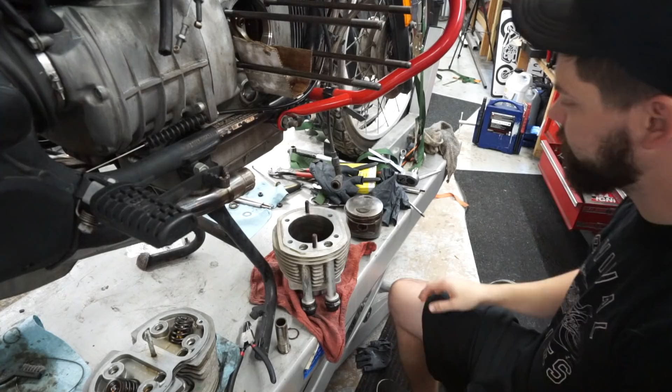Where I left off last time was we had just discovered that a portion of our oil control ring was broken. I had a lot of questions in the comments about, well, where's the rest of the ring? It's all still in here. The rest of the ring is all complete. Everything is completely fine. It's literally just this outside section that broke off.

Very luckily, it did not mess up our piston skirt or the ring lands, anything like that. There was also absolutely no evidence of the break on the cylinder wall itself. Sometimes when piston rings have issues, they can kind of gouge up the sides of these walls. This is 100% exactly like you would expect it, so we're very, very lucky. I went ahead and ordered a complete OEM set, so it's going to include all three rings. We're going to go ahead and replace all three of them.

What I need to do first is pull them off. You can do this by hand. I have a set of piston ring pliers that just make it a little bit easier to do so. If you bend one of these rings a little bit too far one way or the other, they will shatter. I have a video on that very subject. But this is designed to kind of evenly expand the ring out so that you don't run into any of those problems.

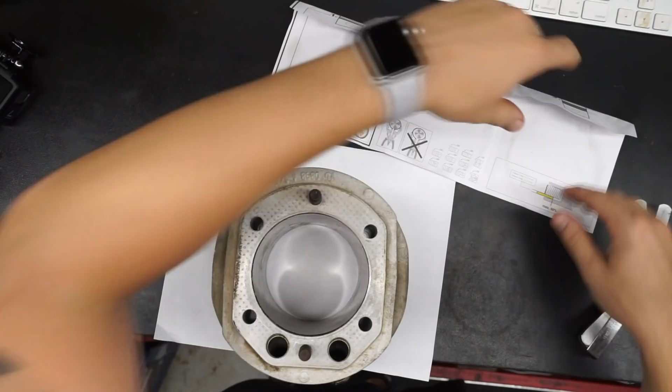Once I get these out, we actually need to measure our new rings and make sure that our end gaps are all exactly within spec. So I'll walk you guys through that process. So what I'm going to do now is measure the piston ring end gap, as it's called. I'm going to start with our first compression ring. This one's going to be at the very top. Generally these do have a top and bottom. There's a little stamping right there that says top, so we know that that's going to be going towards the outside of the cylinder, away from the block.

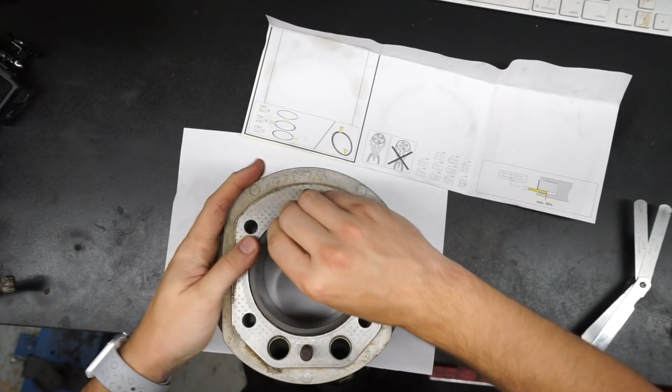What we do is just kind of gently get this into the bore. We're just looking to get it started all the way around, just kind of like that. We take our piston with no rings installed, flip it upside down, and what we're looking to do is press this down and get it nice and square in the bore. And what I can do to confirm that is I am actually using the ring land for the very bottom ring. So I'm using this line right here to make that completely flat with the top portion of the cylinder. That way I know that this piston ring is square in the bore.

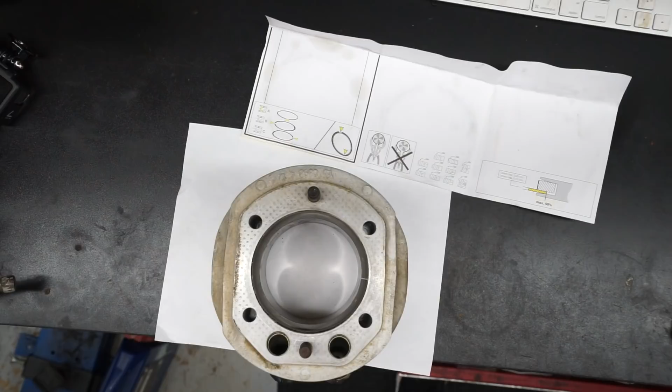Now that I know it's square in the bore, I don't know if you can see on this side right over here, there's a small gap where the end of that piston ring is matching up. There's actually a specification in the book for how big that gap is supposed to be. There's kind of a minimum and a maximum clearance. For this particular bike, we're looking at between, let's see, I got the book over here, 0.4 millimeters on the small side, 0.65 millimeters on the big side. So we want it to fall in between that.

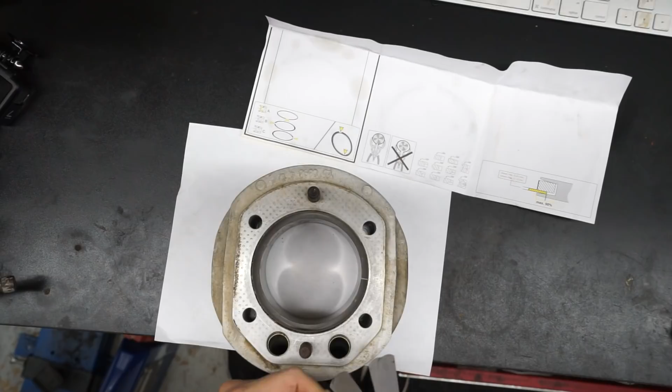So I got my feeler gauges here. I'm just going to go straight to 0.65. We want to make sure it's not bigger than that. 0.65 does not fit in there. So that's good. We'll go down to 0.4.

0.4 millimeters. Plenty of space. So we know now that that spacing is between those two, which means it's in spec. I'm going to go a step further and actually just figure out exactly what it is, just out of curiosity. So we'll try a couple random ones. Did I just nail it?

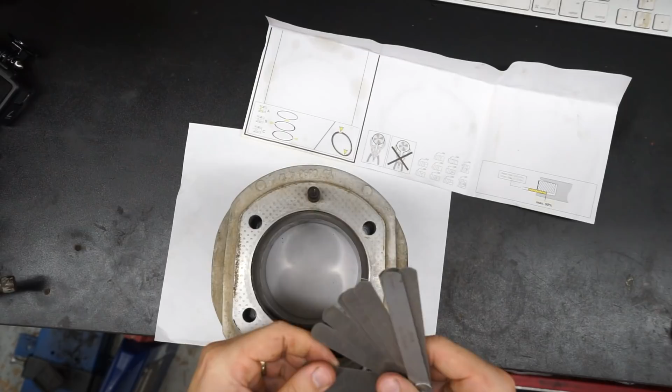Looks like 0.58. Let's look at 0.6. No, wow, I nailed it. 0.58 millimeters is what our gap is, which is exactly between spec. So we can nice and easily kind of evenly pull this out. Exact same spec on the number 2

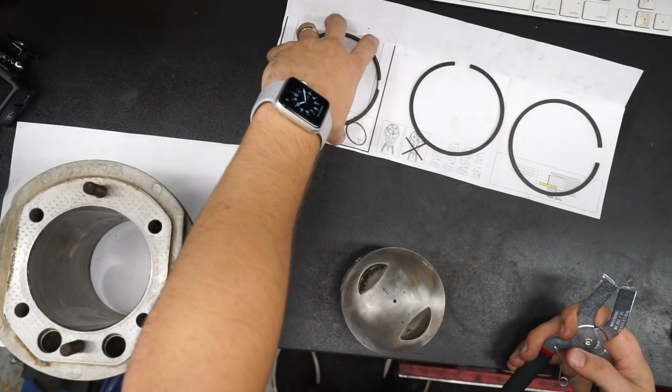compression ring. And then our oil control ring, we want a little bit tighter of a gap on there. We're going to be looking for 0.25 to 0.4. So I'll double check all three of these and then we'll get them installed. Confirmed all of our ring gaps are within spec. Not super surprising with a quality, stock size replacement.

It's generally when you get into the real custom stuff is when you have to start to adjust those end gaps. If you're building an engine for like forced induction or something like that, you'll probably go with a little bit wider end gap to compensate for the added pressure in the cylinders from boost. That can kind of expand those rings, and if they're too tight, you can actually break off ring lands and all kinds of crazy stuff. But this is just a stock engine, so we don't have to worry about that on this particular build.

So what I'm going to do now is just take my piston ring pliers, start to get our rings in place. This little spring part in the oil control ring is a little bit, shall we call it, fiddly. I'm going to see if I can put it on beforehand and then sneak the piston ring over top of it.

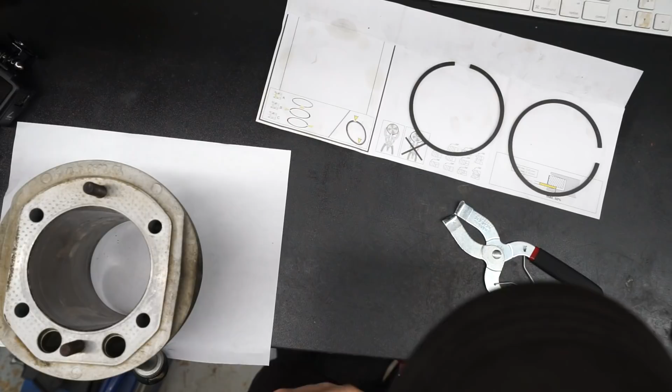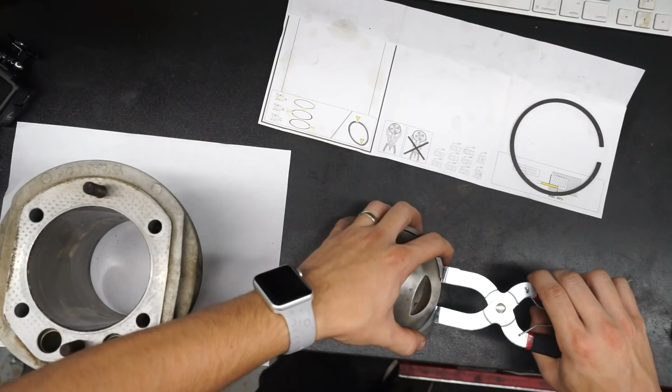And again, this is one of those take your time things. No need to rush it, no need to bend anything or twist anything too much. Once you get them in place, they should move freely. Move up to number 2, keeping in mind that the top is the top of the piston. Get it in the groove nicely.

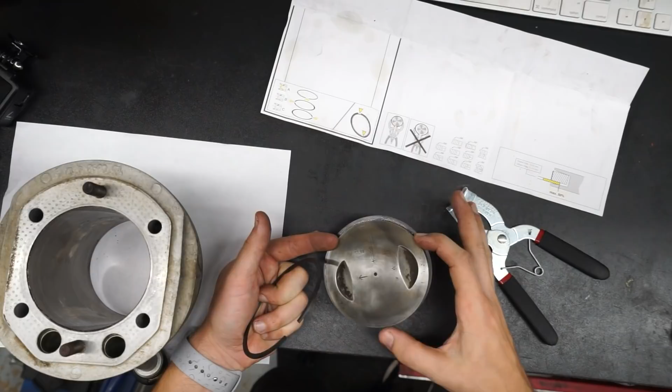We are going to want to clock these gaps as well. And what I mean by that is you want these gaps to be about 120 degrees apart from each other. So, you picture like one over here, one over there, and one down here. We just don't want them all to line up. That's an opportunity for compression to kind of sneak by.

Piston's installed. I'm leaving it sticking out so that obviously we can put our wrist pin and everything back in. Before I do that, I need to replace 3 O-rings. So there's a big gray one on the bottom of this cylinder. This guy right here. This is our replacement. And then there are the 2 small ones that go over our top studs. Make sure this goes in the thing. We've got 2 small ones up here.

Then we need our pushrod tube seals. Here's the new one, here's the old one. Reinstall it just how it came. Same orientation. Just like that. We're ready to slide this thing home.

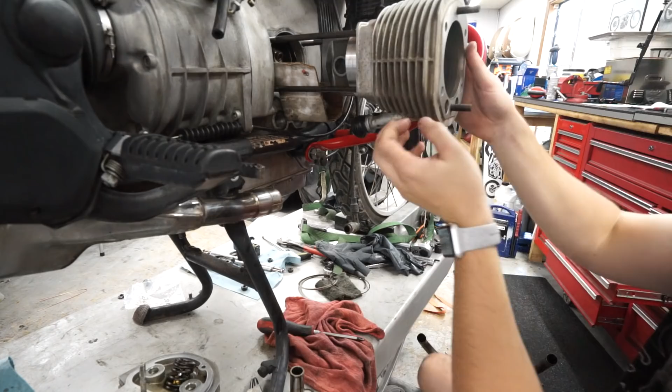Some people will criticize me for putting this in dry. I've always installed my piston rings dry and I have never once had a problem. So there's tens of thousands of miles on engines that I've installed that way. So, you do it however you like, but that's how I do mine.

Now we just need to get this connecting rod, piston, and wrist pin and everything all lined up. Pull our cardboard out, grab our circlip. Once that's all installed, we're ready to make sure our 2 little O-rings are in the proper grooves, which they are. Start to send this thing home.

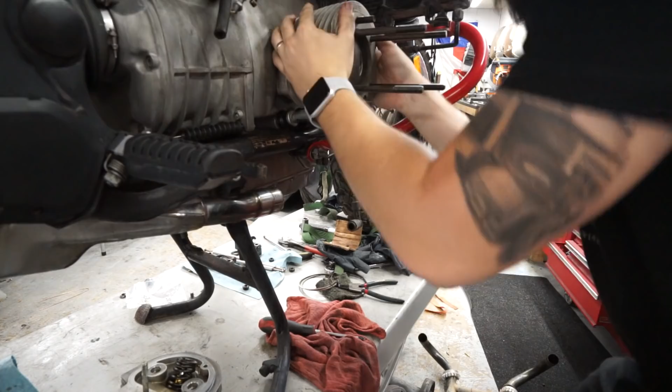I'm not going to bore you guys with the rest of this install since it's exactly what I just showed in the last video on the left side of the bike. So I can get this completely buttoned up and I'll bring you guys back when that part's done. We're ready to move on to the rest of the reassembly.

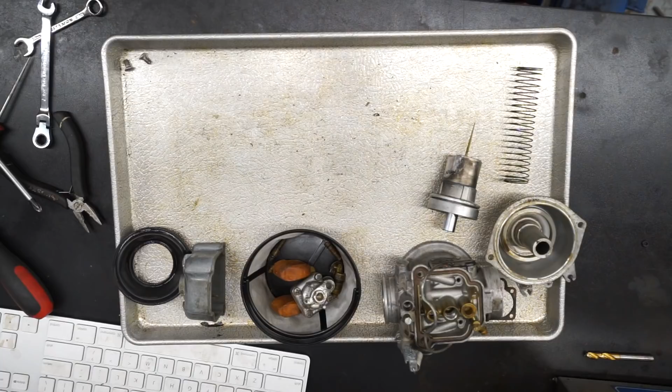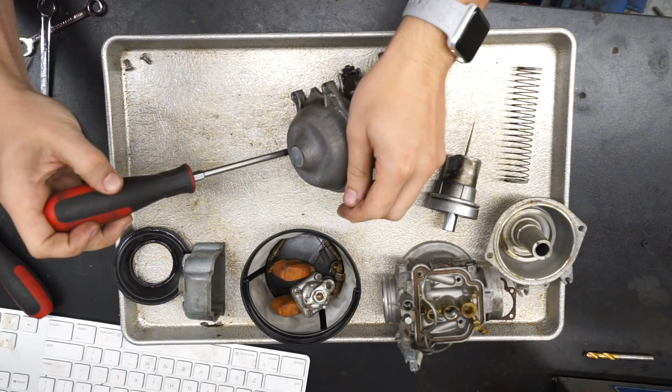Now that I got the engine back together, I'm going ahead and pulling apart these carburetors because I'm gonna soak them in the ultrasonic cleaner. Also, probably gonna vapor blast them. Might as well, if you have the machine. So we should get these things cleaned up quite nicely.

The condition of them is not terrible, if you remember from the very first video, but we didn't actually clean them all that well the first time. We were just basically trying to get the jets cleaned out enough to get it to run. Now we're trying to do a little bit more official rebuild.

I'm going to replace these vacuum diaphragms and then all of the O-rings and then the 2 gaskets. There's one for the bowl and there's another one that's for, I believe, the choke on the side. The rest is just a couple of O-rings. Everything else is going to stay the same, so I need to make sure it's super clean. The little jets and all that stuff are prone to getting clogged up with today's fuels.

So I'm going to get this thing torn apart. We'll throw them in the ultrasonic cleaner, probably run it for maybe 15 minutes to get some of this gunk off the side. I'll bring you guys back when I'm pulling them out so you can see what they look like. Then we'll throw them in the vapor blaster and take them to the next level.

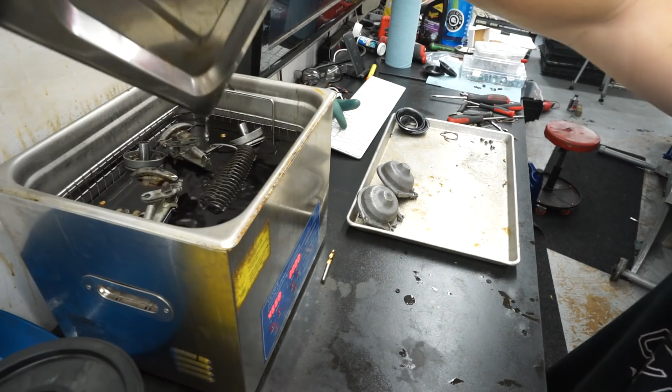Soup's all ready. Let's see how stuff looks. I keep a little jug of water right next to me here so I can kind of rinse everything off. Also cool it off. It's very hot coming out of there. Throw everything on my tray.

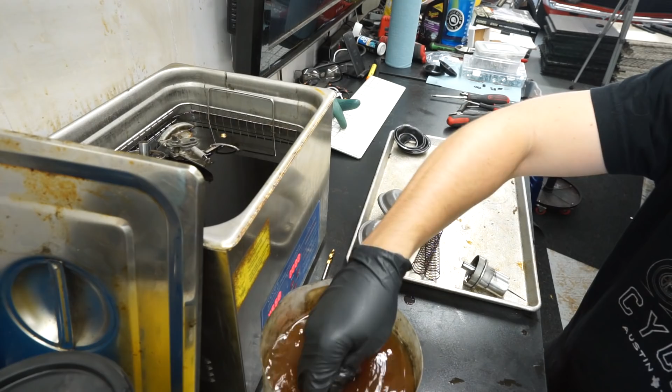Floats look pretty good. Parts for these Bing carburetors are not as easy to come by as they are for the older Honda stuff, the old Keihin carbs, which you can buy most parts for pretty easily. Rebuild kits come with all new jets, all new springs and everything. The rebuild kits literally just came with those gaskets and O-rings. That was it. Unless you wanted to spend a couple $100 on another rebuild kit that came with more stuff, but I guess that's just the BMW tax everybody talks about.

So a lot of this gunk will kind of stay on here, but the main point is to loosen it all up so that when I hit it in the vapor blaster, it'll all just shoot right off.

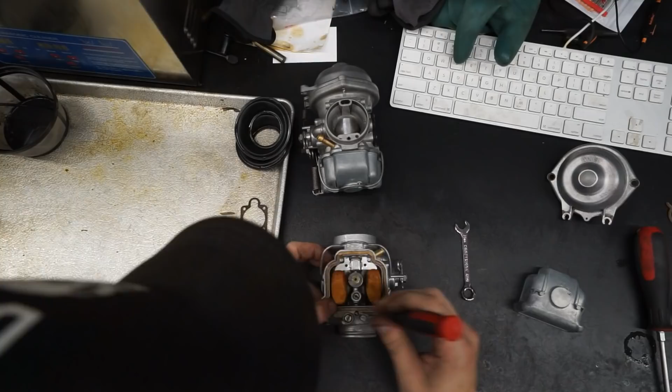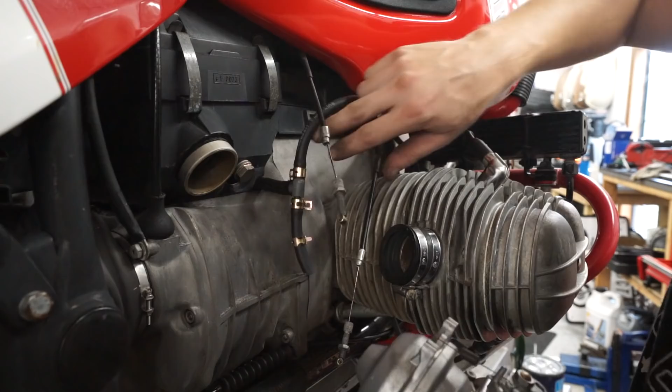Getting the carbs reinstalled. I'm also going to go ahead and take this time. I fully replaced all of the fuel lines as well, just because we're here. They're old and petrified, so it'd be silly not to take a couple of minutes to do that.

I imagine there's some sort of syncing process with these carbs. I'm gonna have to look that up. See how you adjust them, how you get them synced on both sides so that one cylinder is not running ahead of the other one.

It's the next morning and we are ready to cold start this thing. See how it goes. A little bit nervous. All our fuel lines, fuel filters, all that stuff is in place. Nothing seems to be leaking. Well, except my oil pressure switch is still leaking. I didn't order one before because I wasn't sure if that was just residual oil coming off our pushrod tube seals. It is still leaking, so I did go ahead and put that on the list to order.

Let me turn the fuel on the other side. A second. I think a lot of that's just carb tuning and the fact that our carbs are way out of sync, because I've done absolutely nothing to make sure that they're at all synchronized.